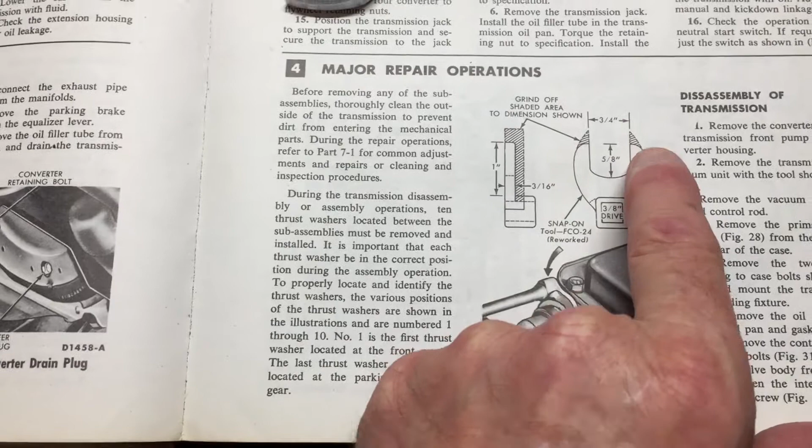I'm not sure if we got it tight. I'll show you in the manual for this. It actually has measurements to grind down a wrench to fit. So we want 3/16 of an inch thick. We're grinding away the gray shaded material and the tips off of the wrench so that it'll fit in. It's such a tight spot to tighten that modulator valve up. So they recommend using this Snap-on one, and you would put a 3/8 drive ratchet into it.

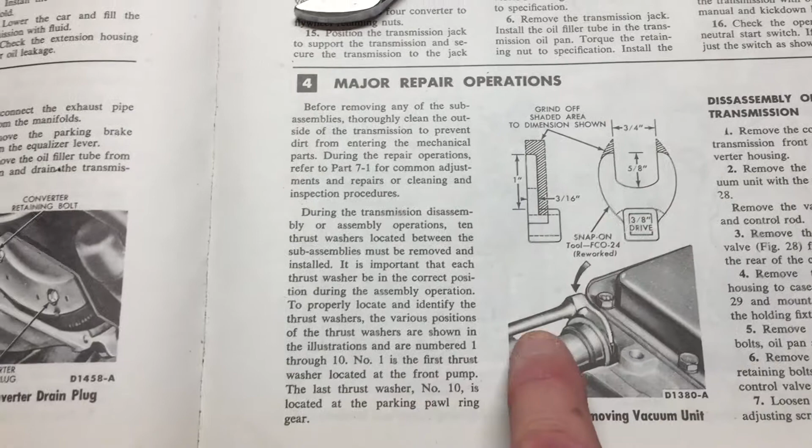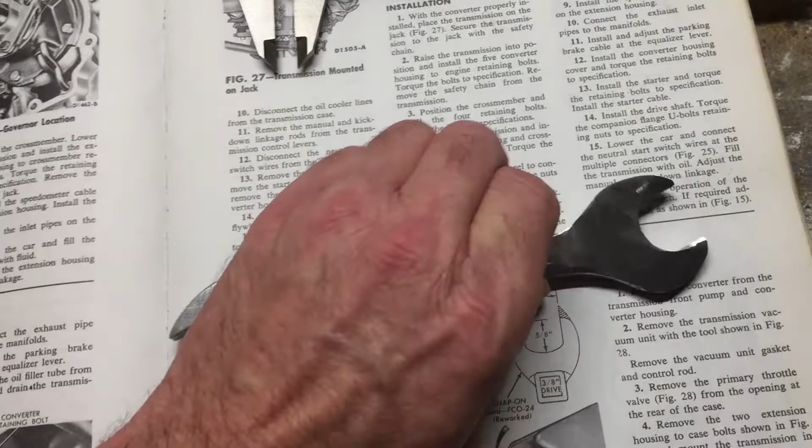I don't have that kind of a wrench head, so I just got an old wrench that was 3/4 of an inch, ground the tips off, and I've ground it down so it's down to the right thickness. They want 3/16 of an inch thick. For my digital caliper, that's 0.1875. So I've got the wrench ground down.

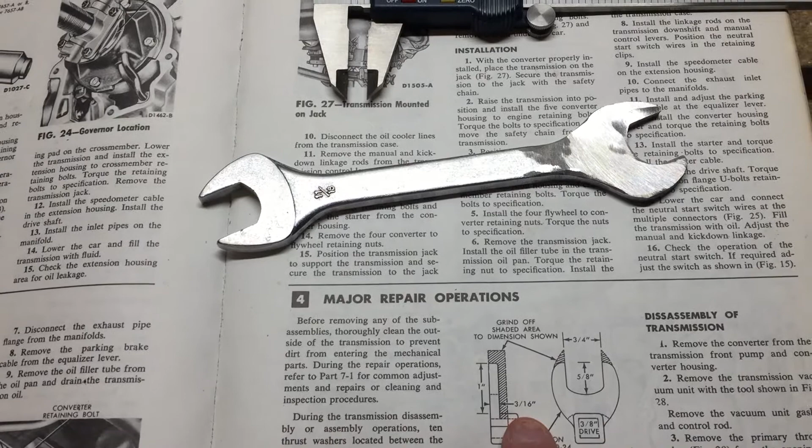I didn't have it ground down quite enough, so it's possible that it's just not tight enough and that's why it's leaking. But there was no gasket material that came with the new one, and there didn't appear to be any old gasket material come off the old one I took out. So I didn't think they had a gasket in it, but I'm going to go ahead this time. I've got some gasket paper here that will withstand the transmission fluid, and it's very thin. It's not going to make much of a difference for the position of the modulator valve once it's installed. So we're going to make our own gasket up and then put it back in.

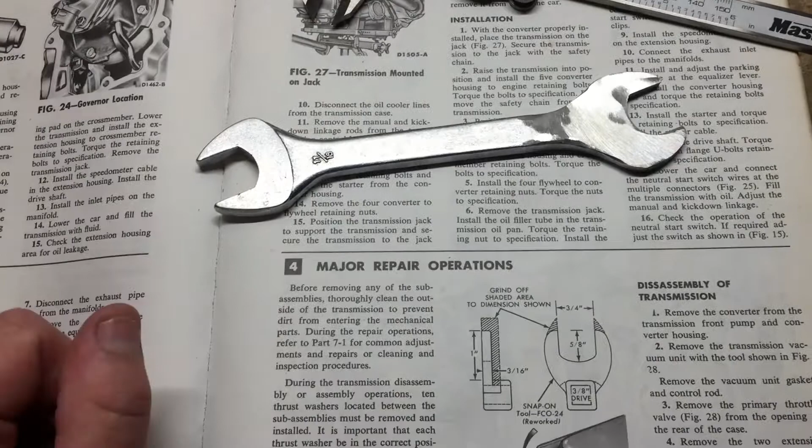So we've already got the car jacked up on axle stands, and I'll go under here and show you where this is on the transmission. So here's your main cross member that the transmission sits on, and that shiny piece back in there with the blue line on it, that's the modulator valve. I'll get into a position here. This is just the speedometer cable, but there's the vacuum line that attaches to the end of it. There's another position I'll move into, and you can see where the nut portion of that is that you have to get to. Right up in there.

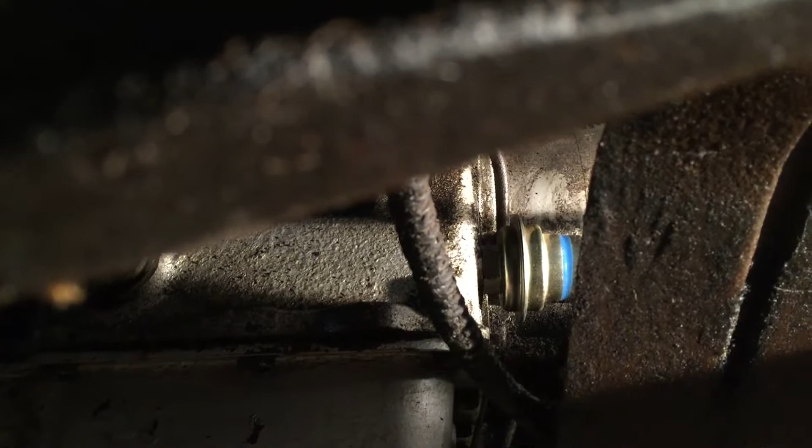So you can see the modulator valve with the blue line on it, and on the face of that there is a nut that's up against the housing, and that's the nut you have to get at. So I can reach in this way with just a standard wrench that's ground down to fit in there. The special one that they mention probably would make the job easier.

So I've got my drain pan cleaned out. I'm going to take that modulator valve out first, and transmission fluid will run out of that hole. So I'm going to let that drain down as much as it wants to into the drain pan. When it stops running, then I'll get a gasket made up and we'll reassemble it, and hopefully that'll take care of our drip.

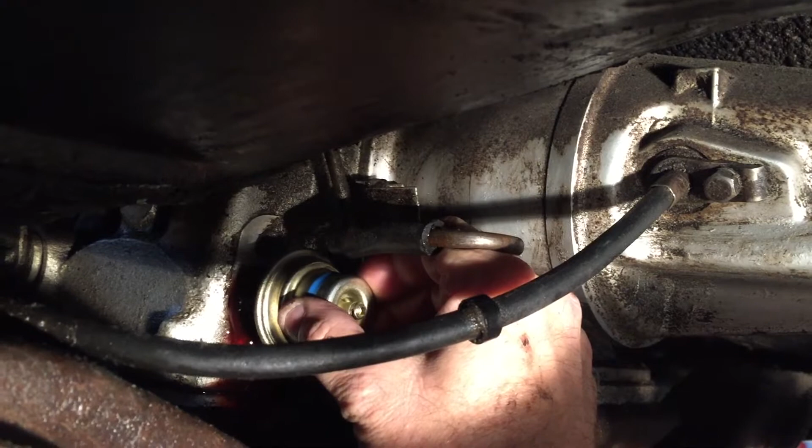So I'm just holding that there. It's unthreaded, and you can maybe see the transmission fluid running down into my drain pan. I don't want to pull it out all the way, or the fluid will run out of there so fast it'll just land on that cross member piece and run all over the place. So I'm just going to stay here like this for a bit until the flow diminishes to where I can take this out completely.

If you're going to reuse your fluid, make sure your drain pan's cleaned out well first. You don't want to add any foreign material back into the system.

Oh, got a little carried away there, took it out too far. Alright, you get the idea. So I'm going to thread that back in a little bit to stop it, and just let it drain some on its own. When it stops draining, I'll take it out completely, make a gasket, and put it back in.

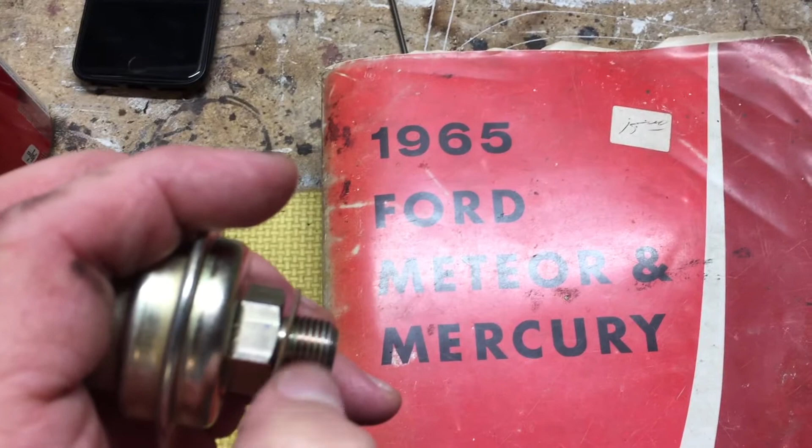Okay, so there's our modulator valve, and there's a little gasket that I made up out of the gasket paper that I had. So it's not perfectly round, but that's going to be fine. When we tighten that back up in there, hopefully that's going to stop our transmission drip, and we have a couple other things to do to the car.

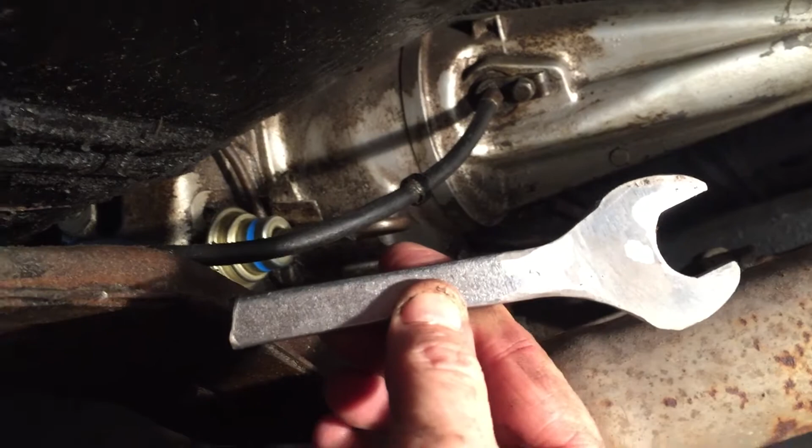Okay, so we got our modulator valve back in. I had to cut, I'll show you, I cut the other end of this wrench off. I could get in there where I showed you, but to try and turn it, the other end of this wrench just kept hitting the floor. Didn't matter which way you turned the wrench, it was always in the way, so we just cut it off. So now we have a very specialized tool. We'll put that in our toolbox specifically for this vehicle.

So we have that done. The only other thing, this vacuum line that goes on the end of this modulator, there is a clip right back in here, I know it's just out of view. There's a bolt right back there, so you'll have to take that bolt out so you can pull that line off of there. So I just have to put that bolt back in now, and we'll put the fluid back in.

There's other things we said we wanted to do, so I don't want to start the car and heat it up yet to see if that fluid's going to leak, but we will.

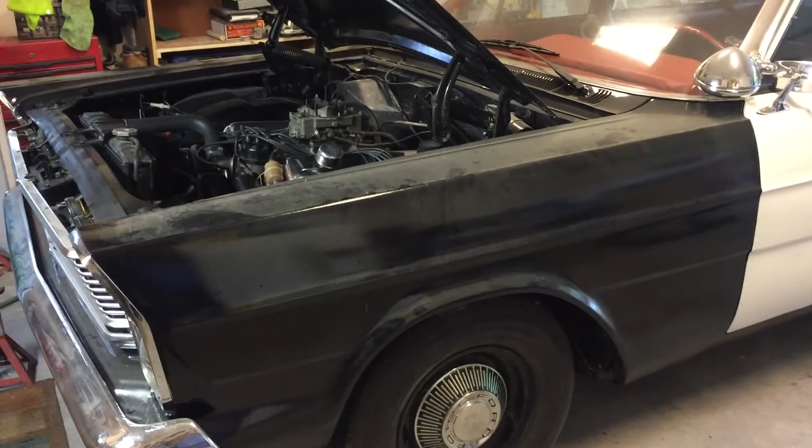Okay, our modulator valve's done. We got our fluid poured back into it now. We don't see any signs of leaking underneath there, it's not dripping from it at the moment. Once we warm things up and the oil gets a little thinner, we'll check again and make sure we don't have any leaks underneath.

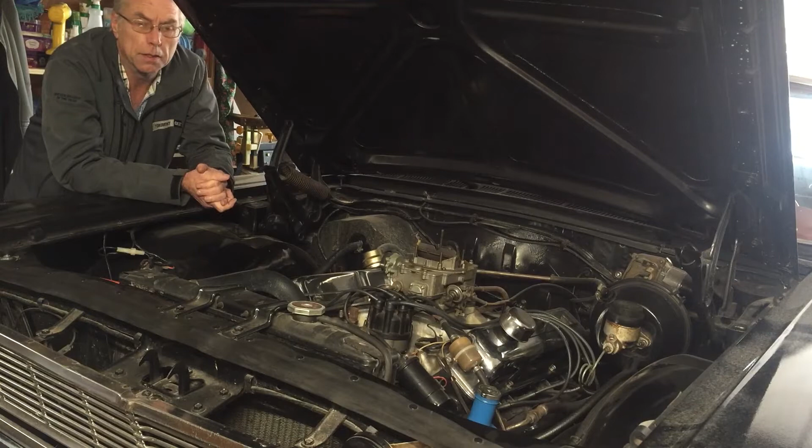But before we get things too hot to work on, the next one we're going to move on to is the oil leak. Same thing, the drain plug in the oil pan's dripping a little bit, so we're going to make the same kind of gasket. But before we can do that, another issue we've always wanted to take care of, there's a sticky lifter in this car, and when it gets hot, you can hear the ticking noise from it because it's sticking. So I had a friend with another old vehicle, and he recommended using a product called Rislone. It's an engine cleaning product, supposed to clean out varnishes that build up on things like that.

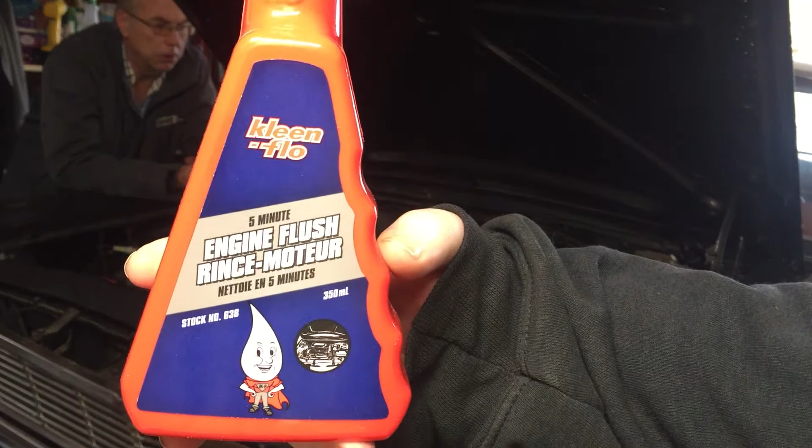I couldn't find the Reslone brand, but I did find another brand of the same type of material. First thing we need to do, they tell us, is to warm the engine up first. Then we're going to drain a little bit of oil out of it just so there's enough to fit that bottle of product in it. We got to run the engine for 5 minutes till it's warmed right up, and then drain it completely out and do an oil change on it. So we've got everything we need to do it, we just got to get at it.

So we took the drain plug out of the oil pan, and it has kind of a nylon washer on here. It's dried out, it's hard, it's cracked. I think this is where it was dripping from all the time. So I'm going to try and pry this off of here, and we'll make a new gasket up for it ourselves.

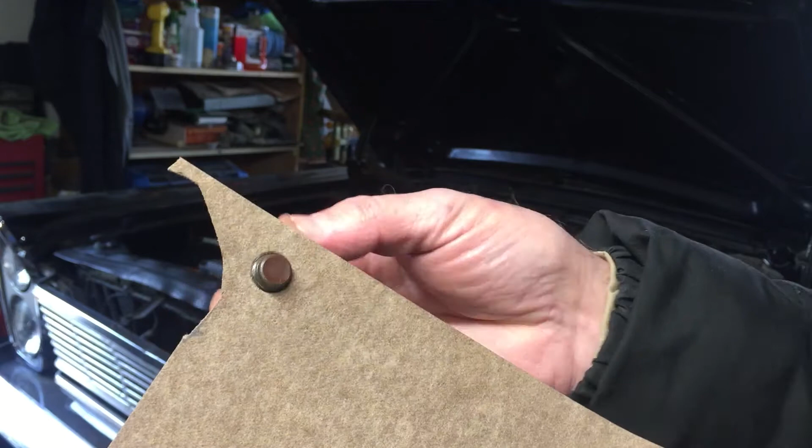So there's our circle for our bolt. We put that on the steel anvil part of the vise and just used a 3/8 socket, hammered it on there until it just cut right through, so we have a nice hole. The threaded portion of our bolt is a perfect match. So now we just got to trim the rest of that gasket off.

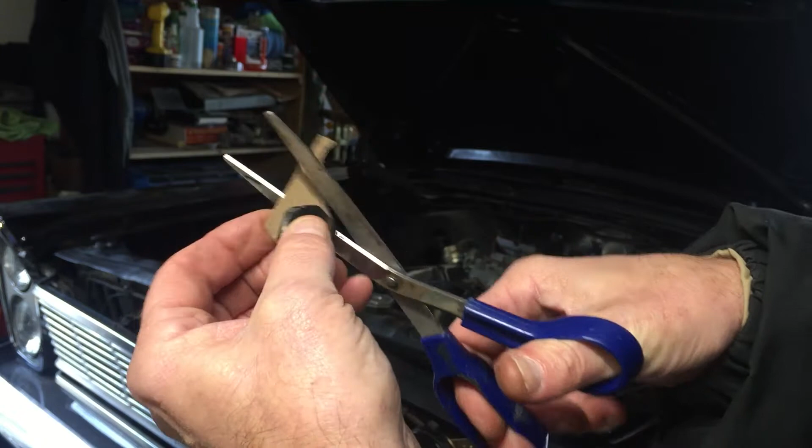And we have our new gasket for our bolt now. So we're going to let this sit and make sure it's well drained to get all that engine flush material out. And we'll put this back in, change the filter, fill it back up. Hopefully we've taken care of another leak and possibly another issue with that sticky lifter, I hope.

So we've taken care of the oil leak that we had for the drain plug in the oil pan. We took care of the transmission leak, we hope, from the modulator valve that was leaking. We ran the engine cleaner through. We have not had a chance yet to run the car, warm everything all up, see if it's quieted down, see if the leaks have stopped. But we're moving on to our last leak, and this is an exhaust manifold leak.

So this exhaust manifold down here, the bolts kept wanting to come loose. They wouldn't stay tight on it. So we took out one end bolt just so we could match up size. We went and bought 8 new bolts and washers for it.

So we're going to take this off, pull the gasket out. I think it's burnt a hole out this end of the gasket down at this end. And I don't have a new set of gaskets at this time to put in. So I'm going to use some high heat silicone, just to try and patch up this gasket and put it back in.

So this is the last of the leaks that we have to try and solve. Some of the bolts are difficult to get at. So the 4 on top is just that one, and that one, and the one at the end down here. So those are relatively easy. The one that's underneath this front corner isn't too bad. You can feel it under here, and you got some room to work in here with a ratchet and stuff.

The other 3 that are on the bottom you have to do from underneath. And I can't recall, it's been a while since I've worked on that area, but I do believe it involved a swivel and some extensions and whatnot to get at them. So we'll get those out and then we'll come back.

Sometimes I don't know how detailed to make these videos.

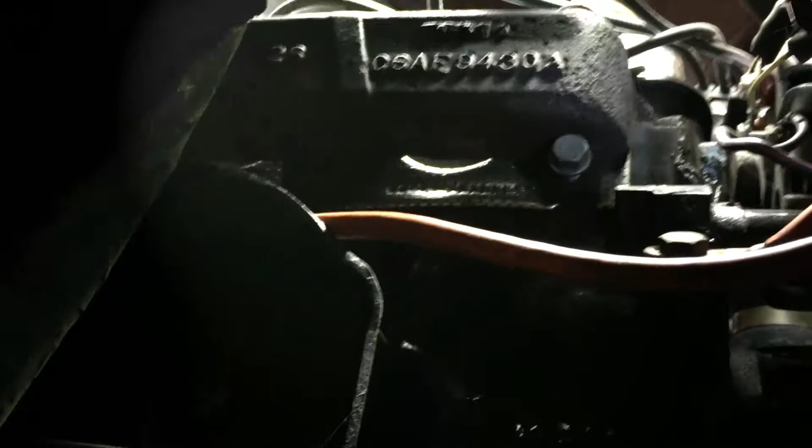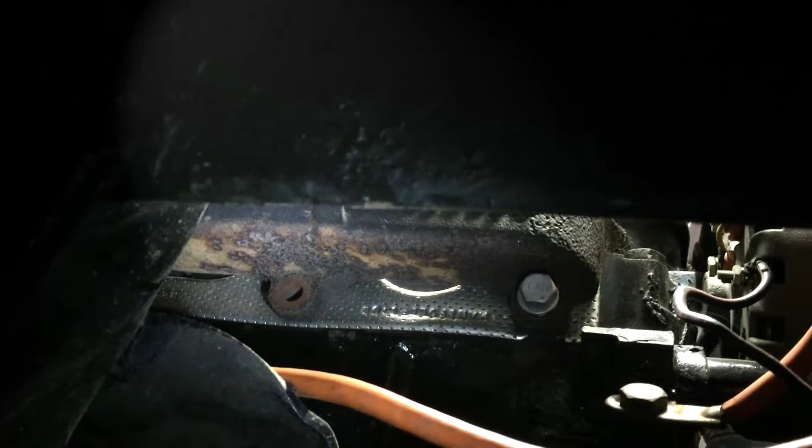So I'm under the car now, looking up, coming in from under the front bumper. So there's the first one that I said was easy to get at. From up above, you had enough room, you could feel that and you could work at it. The second one, if I can get it in here, there's the empty hole. I've already taken the bolt out. So I did use a swivel on the end of a socket and a long extension to get me down past the cross member and stuff in here so that my knuckles weren't banging up against anything being up in there too close.

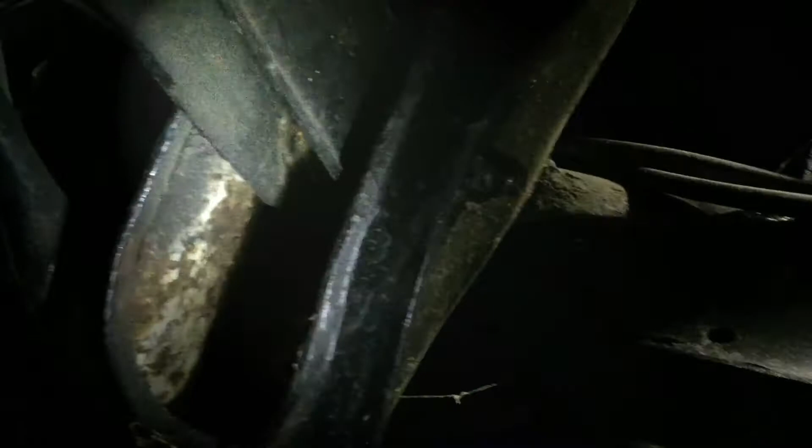That's the second one from the front of the engine back on the bottom. Now the third one, it's tough to see, but this is the front cross member that comes across under the oil pan. There's our drain plug in our oil pan that was leaking, then we cut a gasket for that. So we need to get behind that cross member. I'll see if I can get myself back here.

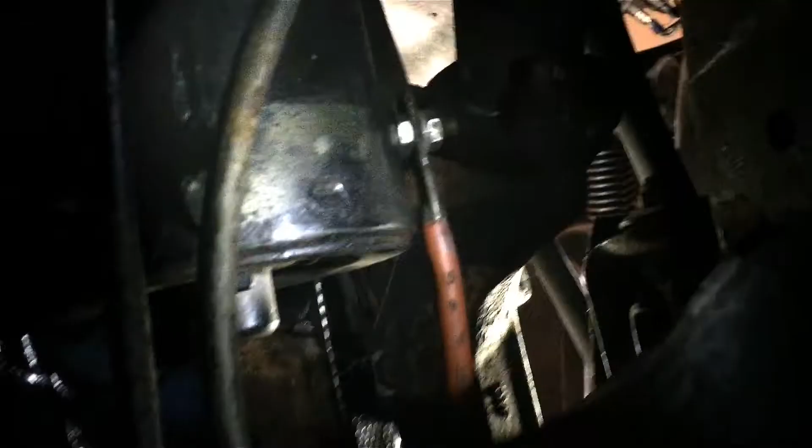Apologize for this being so dark. So what you're looking at that the flashlight is shining on, that's the starter. There's a live cable on the side of it, so that's the end of the starter there. Just to give you an idea where we are. And there's our third bolt back from the front that's up there. So again, with a swivel and an extension to reach up in there, you know, it's in the open, it's fairly easy to get at. So we'll take that one out next.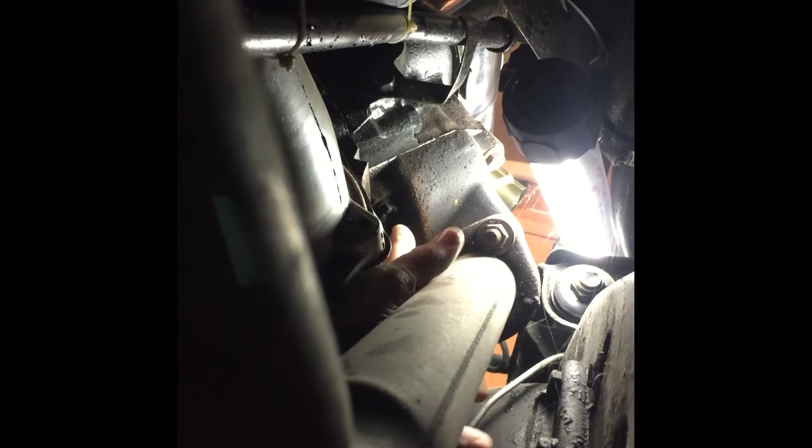Okay, so the last bolt on the bottom is that guy right there. This is definitely a trickier one to get at. Now, if you undid this exhaust pipe and pulled it out of your way, it would probably make it a little bit easier, but I don't want to undo this pipe. It's not a factory exhaust system on here. Dual exhaust was added, and whoever did it, some of the bends in this pipe aren't exactly as they should have been. So we've had some trouble in the past getting that to seal up.

So I don't really want to undo those bolts. So again, with some swivels and stuff in there, I think I can get at it, but that is definitely the tough one. Now I'm coming into this from the other side, so I'm behind the front wheel of the car, coming into it from that side.

So this is the exhaust pipe coming from the rear of the car, coming up to that manifold. Just to give you an idea of whereabouts I'm laying under the car now so that you can see it. This, of course, would be a lot easier if you had an actual garage and a hoist, where you could have the thing as high as you need it to be to stand under it and get at these things. That would certainly make it easier, but I cannot hold the camera in this position and do this at the same time, so I'm going to have to turn the camera off and come back later. All right, we got that bottom one out.

So all we have left now are these 3 on top, and they're easy to get at. We have this one, and another one hiding under here. So we'll take those last 3 out.

Now, when you're doing this, I don't know if the original gaskets would have had all 8 holes as round holes right through the gasket or not. This was a replacement gasket once already. The bottom 2 bolts, the one that was really tough to get at the back and the one at the bottom front, the gasket itself is slotted so that you don't have to remove the manifold. You just need to loosen it off and get it to separate away from the block, and that gasket will slide out. That's really nice, because if you had that style of gasket where those end ones are slotted, you'd start those 2 bolts, which I've already started in place, and you can just drop the new gasket in. It'll rest on them and all your other holes are lined up. So it's nice that way.

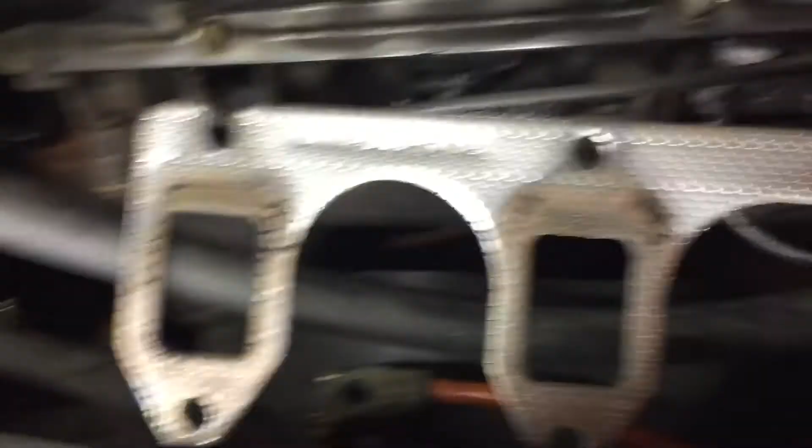Here's one of the other previous ones that we had taken out. So you can see how that hole is slotted compared to these other ones that are just round holes right through it. So there's the slotted one on the other end. Those will just slide down in there, resting on those corner bolts on the bottom, and that'll keep everything in place and lined up.

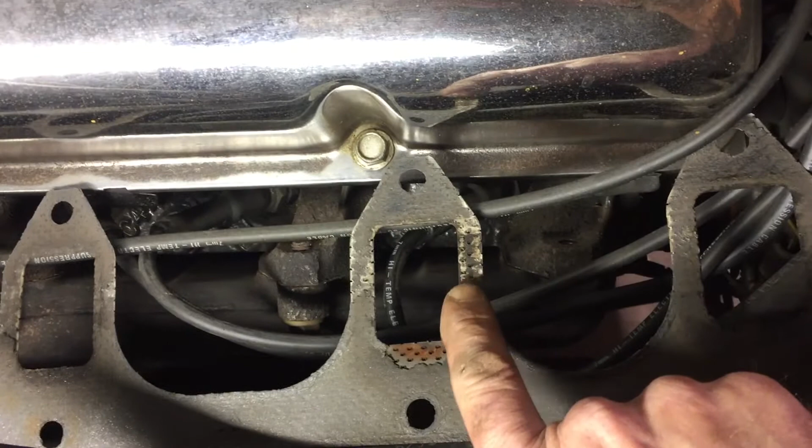So as I said, this side is the only side that we've had an issue with the bolts continuing to come loose and leaking. So we did buy a set of replacement gaskets. This was the first one we had put in, and you can see what happens when they come loose. The pressure from the exhaust burnt or blew off whatever this coating is right around this exhaust port here, and that's where this one had an exhaust leak. So we took it out, put the second one in from the set, and now it's done the same thing again.

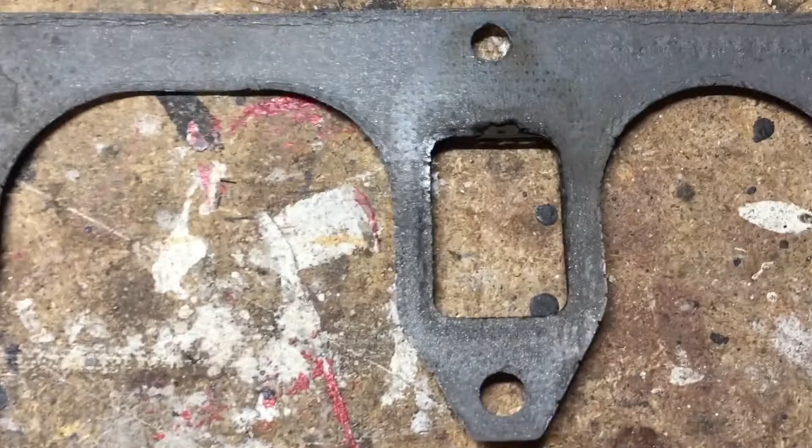So rather than just buying another set of gaskets, I'm just using some high temp silicone this time. We'll take one out, put some silicone on it, and drop it back in there. So this is the one we just took out of the car now. If we get in closer, you can see where it's burnt the material off the gasket down here.

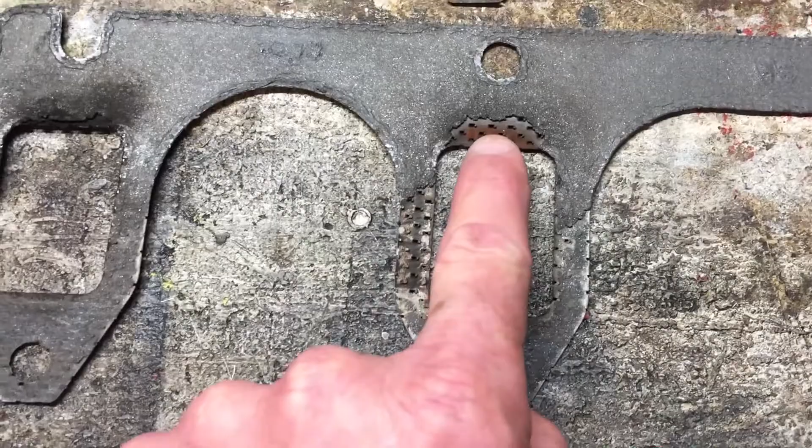There's pretty much no material left all the way around the end of that port, and you can see how heavy the black soot is there. It was definitely leaking exhaust out the back of the manifold. So that's the one we just took out. The previous one that was in there before, we're still good on the first 2 exhaust ports. This one has a bit of material burned off the side here and down here, and that one still looks good. So this is by far the better of the 2 gaskets.

So we'll just put a little bit of high temp silicone in these areas, and we'll put this gasket back in instead. Well, I think we're done. Got her all back together now.

It's been several months this car has been sitting since it's been started, so I'm sure it'll take a little bit of turning over to get fuel pumped up in it to get it running, but we're going to start it up. We'll let things warm up, thin out that oil and transmission fluid, and see if we have any leaks.

There were a couple of oil stains on the floor of the garage from where it had been dripping before, so I put a clean piece of plywood underneath there, so there's no oil stains on it. If things start to drip after it's shut off and sits for a while, I can come back and check later to see if there were any leaks. We'll see if our exhaust leak has quieted down, and see how everything turned out.